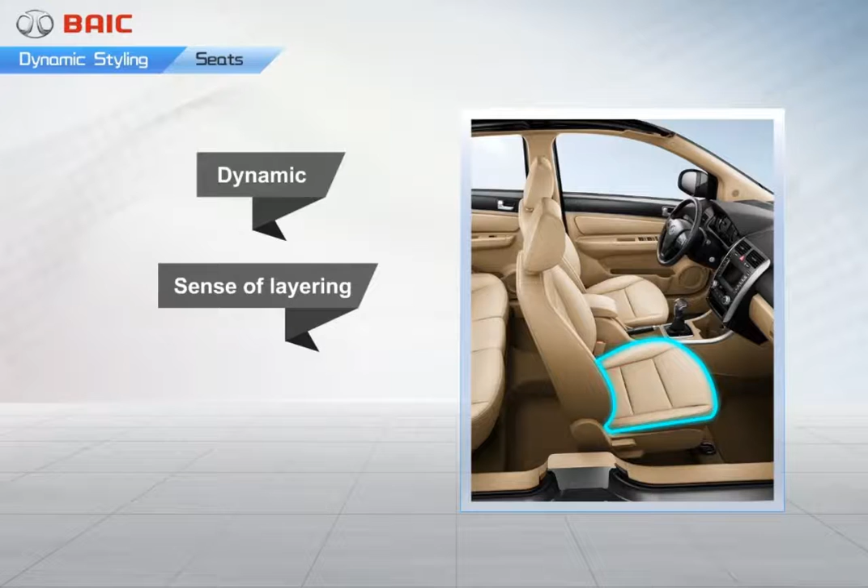The main seat fabric adopts a more dynamic and layered pattern to enhance the dynamic atmosphere of the interior.

The three-spoke sporty steering wheel design of the Senova adds a thumb groove in line with human hand ergonomic principles, enabling the driver to hold the steering wheel more firmly. The steering wheel has a large diameter and an almost vertical angle to generate a great sense of sports driving.

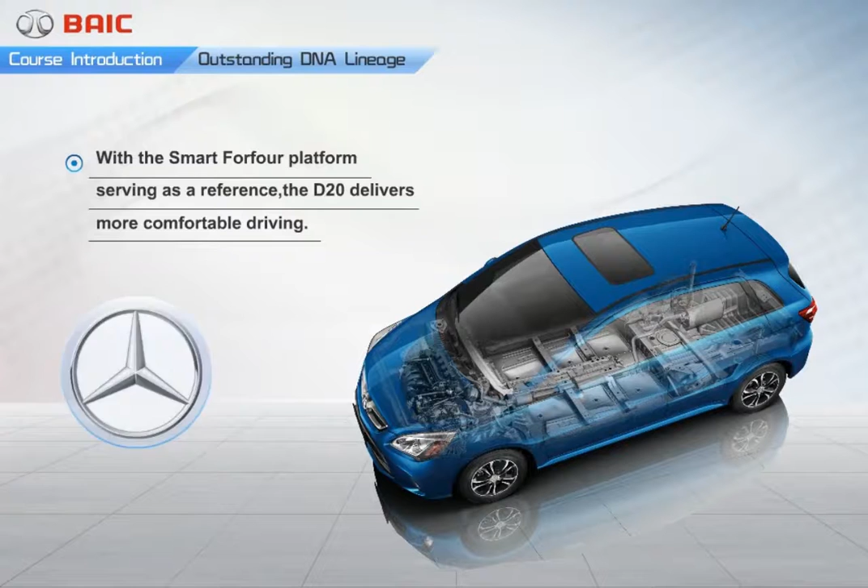With the Smart Forfour platform serving as a reference, the D20 incorporates MacPherson suspension at the front and rear torsional beam suspension to achieve more comfortable and stable steering control. Its steering system features variable speed ratios and a high rigidity steering column to ensure more responsive control.

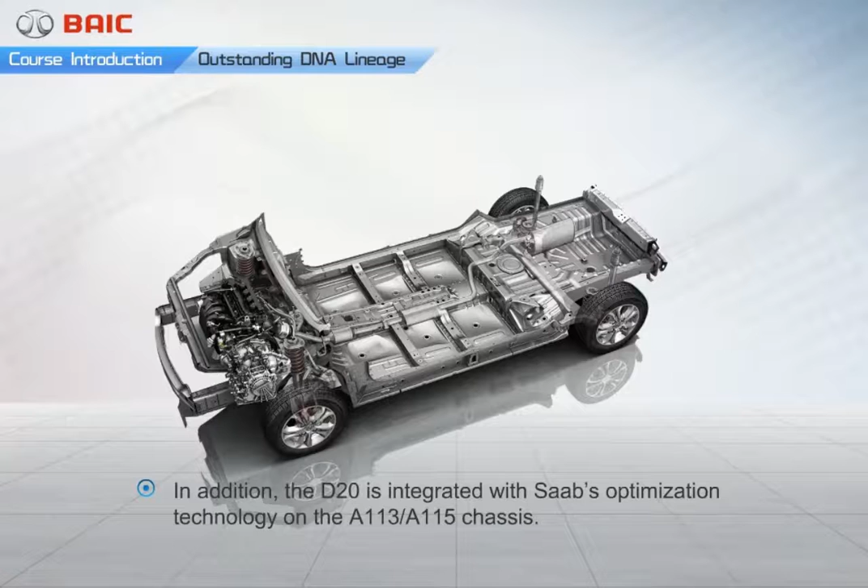Based on the A113-A115 chassis, the D20 is integrated with Saab's Nordic optimization technology to achieve outstanding chassis weight reduction. Saab standards are also implemented for the parts quality management of the D20 to ensure perfect quality from individual parts to the entire vehicle.

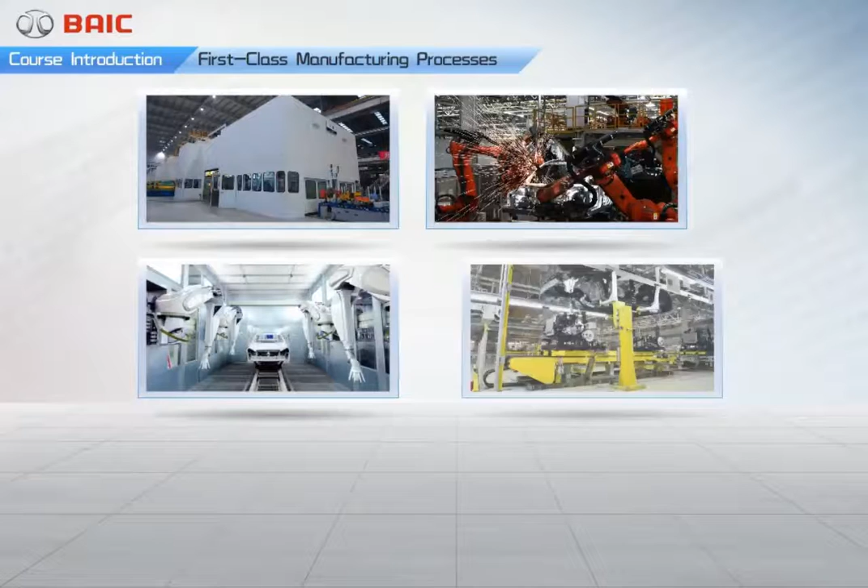The D20 plant features 4 major processes, i.e., stamping, welding, painting, and assembly, all of which are designed in accordance with Hyundai's model. Saab's established production line suppliers are also a crucial link in the world-class manufacturing technologies integrated into the D20.

100% automation is used to install all the key components of the D20 to ensure extremely high product quality stability, and that every D20 is an exquisite product.

Outstanding chassis and manufacturing processes alone are not enough. For the tuning of the D20, BAIC has brought in Mira, a world-class auto tech company which has also served Jaguar and Volvo. Using advanced simulation software and thorough rounds of meticulous tuning, Mira brings outstanding chassis controllability to the D20, integrating Saab's DNA and perfectly combining comfort and controllability for great driving fun.

To ensure that every D20 is an exquisite product, which of the following processes is a world-class manufacturing technology integrated into the D20? Please select.

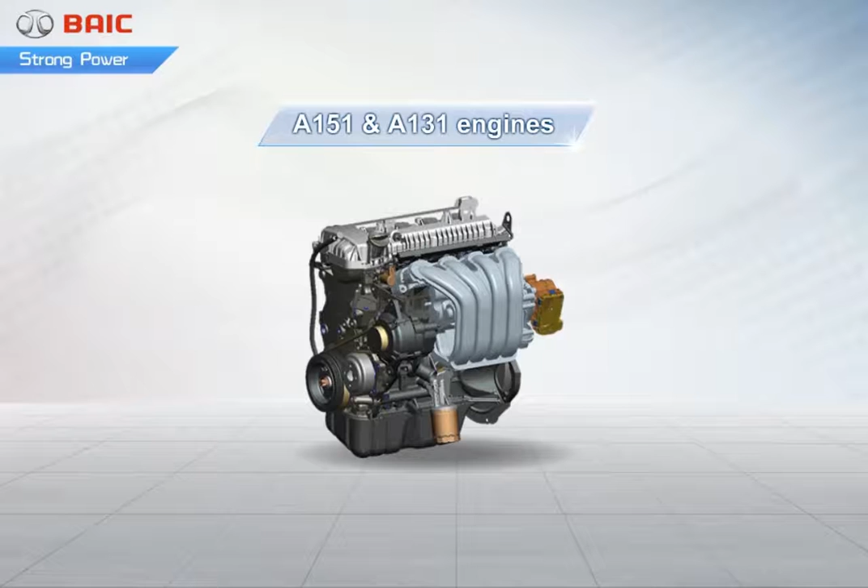Now let's look at the power aspect of the D20. In this part, we will begin with the engine and transmission. The D20 is equipped with a completely new A151 or A131 engine, meticulously developed by BAIC Powertrain Company Limited. These engines are characterized by powerful output and ample torque.

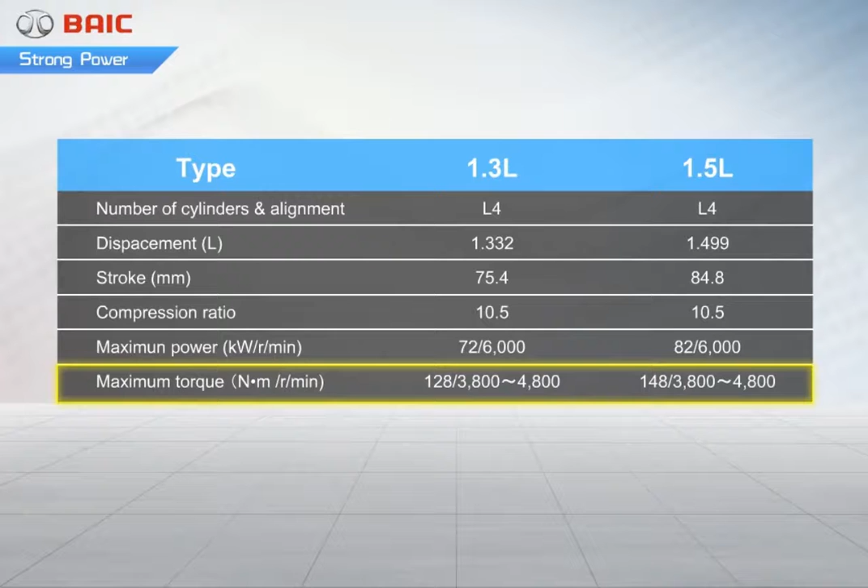Among cars of the same class, the engines installed in the D20 have greater power and torque per liter, allowing easier vehicle starting and acceleration. The engine generates its peak torque at 3,800 RPM to drive the vehicle forward at full speed.

As for the main technical features, the following items are included with the engines used in the D20: variable length intake manifold, low friction design, lightweight, and intake VVT control technology. Now we will look at these features one by one.

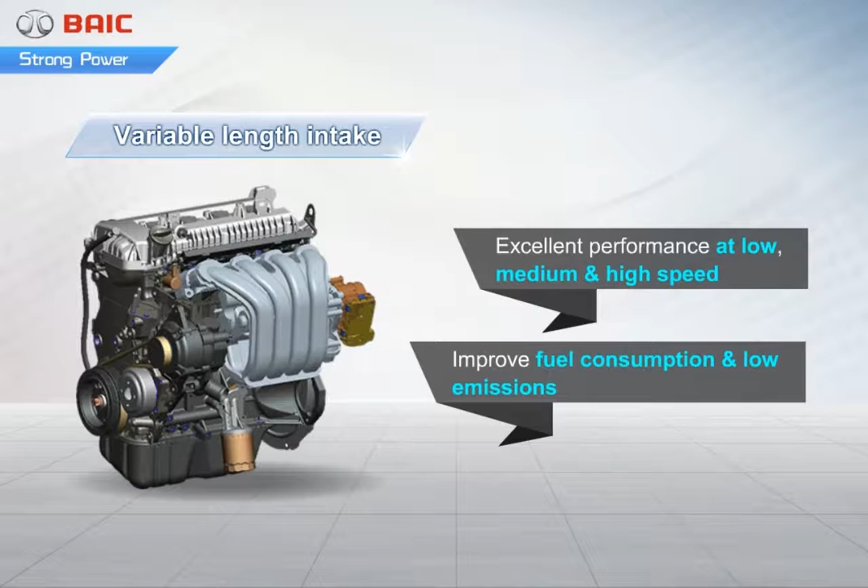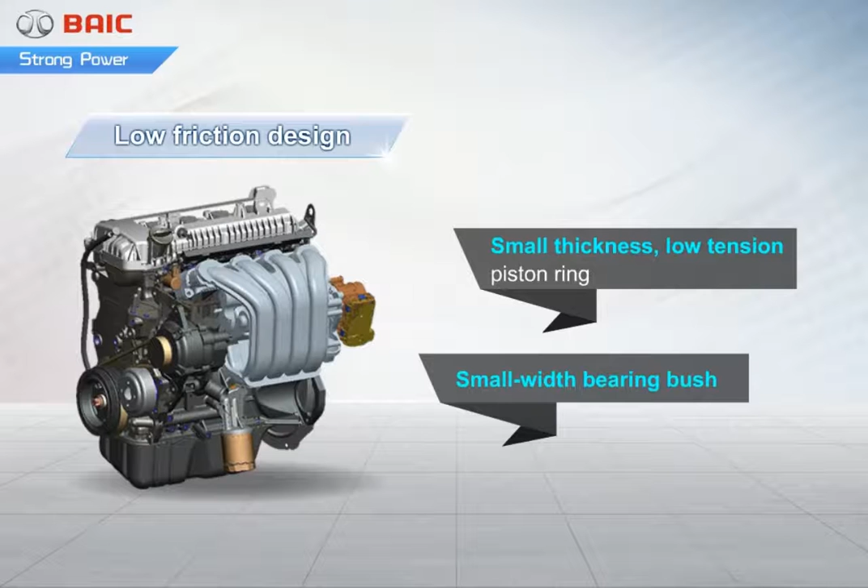The variable length intake manifold ensures excellent performance at low, medium, and high speeds, and can markedly reduce fuel consumption and exhaust emissions. In addition, the low friction design adopts a coating layer on the piston surface. Friction is reduced through a small thickness, low tension piston ring and a small width bearing bush.

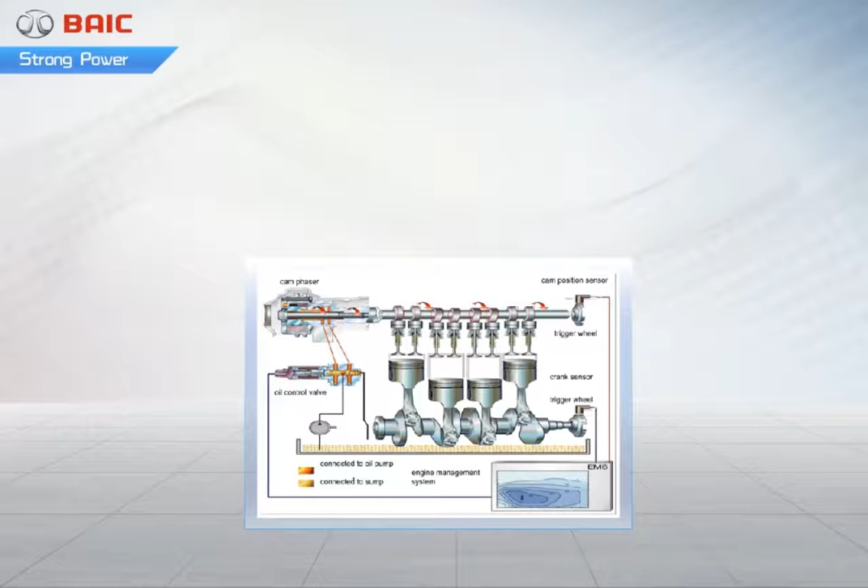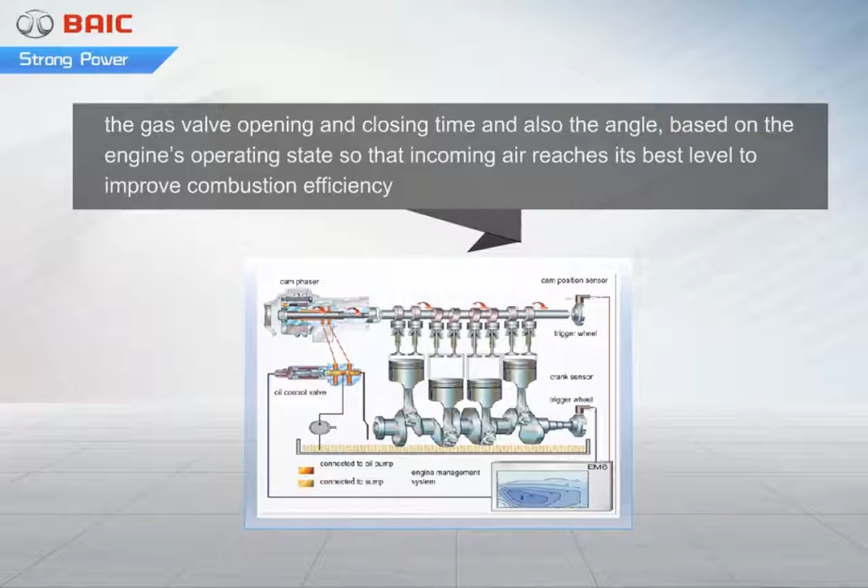VVT is a technology that can adjust the air intake exhaust volume, the gas valve opening and closing time, and also the angle based on the engine's operating state, so that incoming air reaches its best level to improve combustion efficiency, while ensuring high torque at low speed and high power at high speed. It helps the vehicle achieve higher fuel economy. This engine technology makes the D20 the best economy family car for urban users.

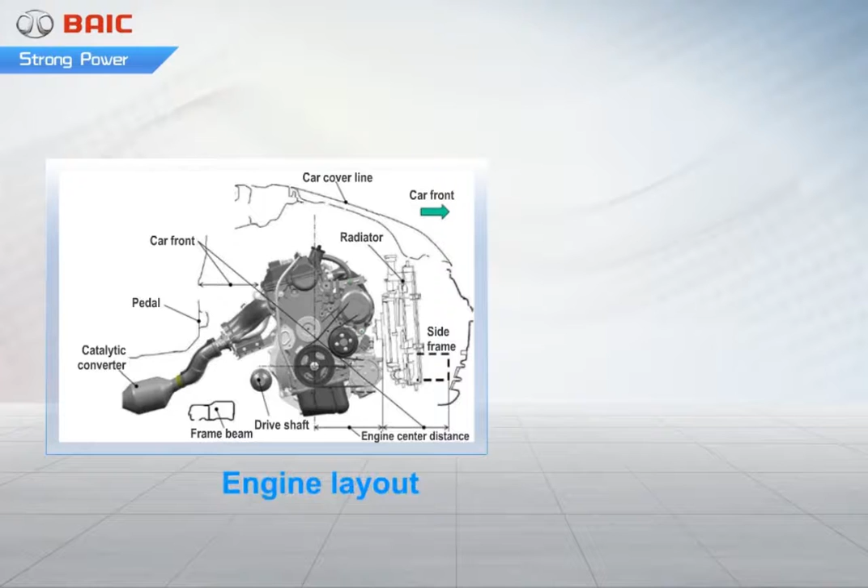In addition to their technological advances, the engines used to power the D20 have even greater layout advantages. The D20 makes use of a rear exhaust engine layout. This not only reduces the number and weight of components of the exhaust mechanism, but also allows for a shorter exhaust and higher exhaust efficiency, all of which leads to better engine power performance. Meanwhile, the rear exhaust layout can also expand the buffering space of the engine compartment and enhance safety.

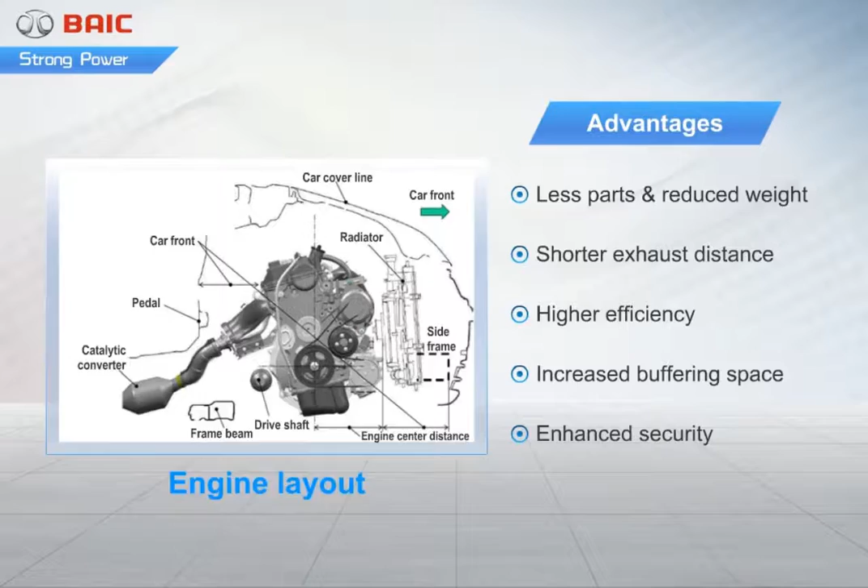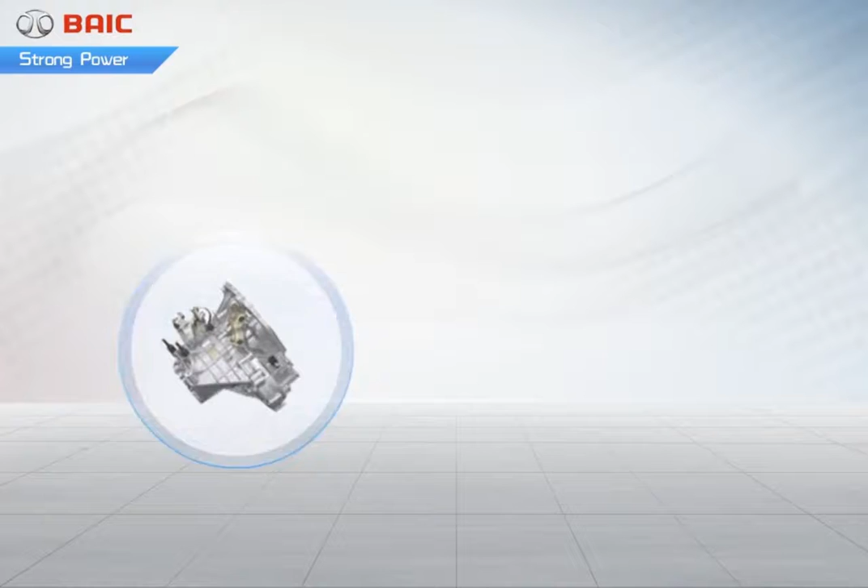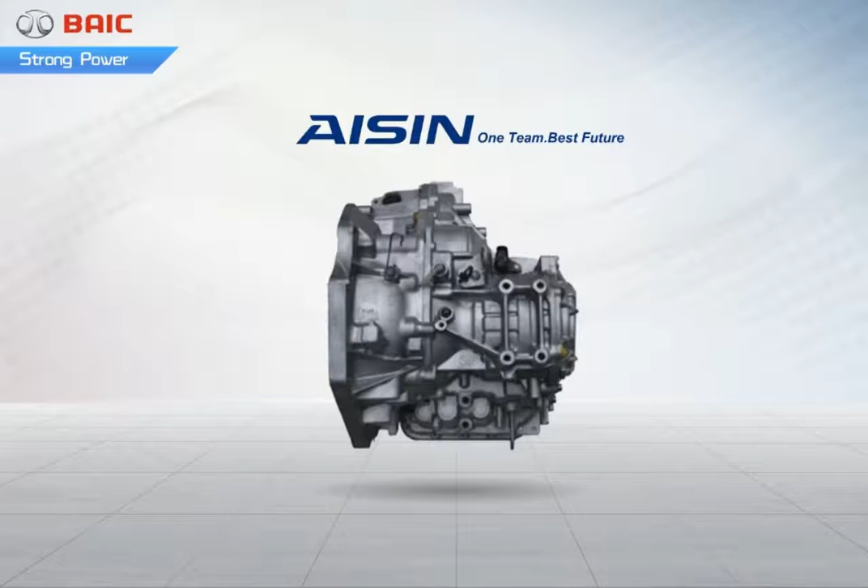Next, we will focus on the transmission of the D20. To meet different customer needs, the D20 has two kinds of transmissions: manual and automatic. The manual transmission is produced by a domestic Chinese company and features mature technology, and is very popular in the market. The D20's automatic transmission adopts Aisin 4-speed transmission technology.

Aisin is a famous transmission brand around the world. Its transmissions are extremely popular with all leading car makers for their smooth gear shift, lightweight, low noise, and ability to promote low fuel consumption. Almost all models of the famous car brand Toyota are equipped with Aisin transmission technology.

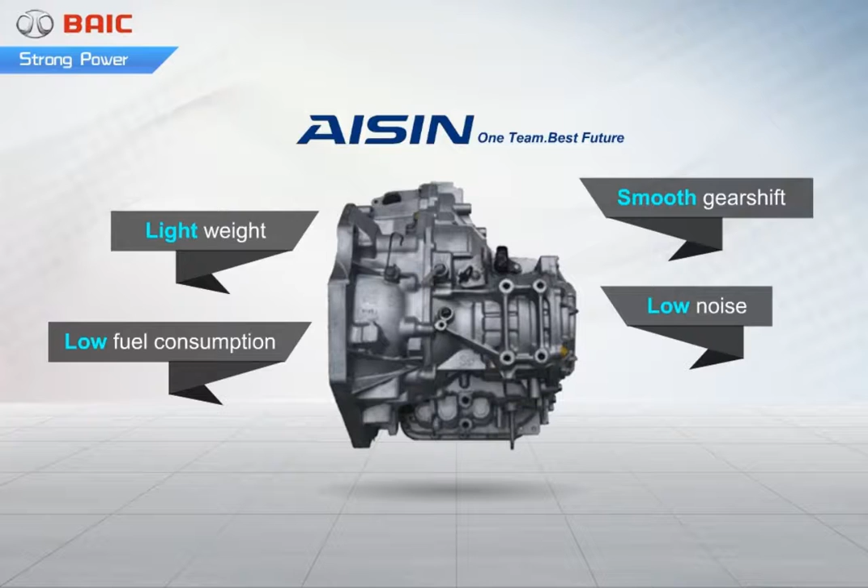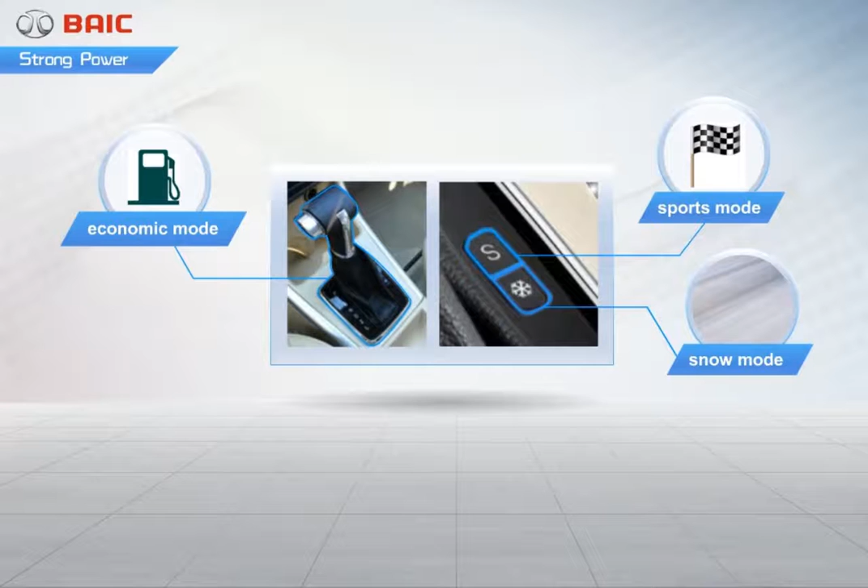The D20's automatic transmission has 3 modes: Eco, Snow, and Sport. You can switch over between these 3 modes by pressing the button beside the shift lever. Different transmission modes mean that the D20 can adapt to various road conditions and driving habits and achieve greatly enhanced overall controllability.

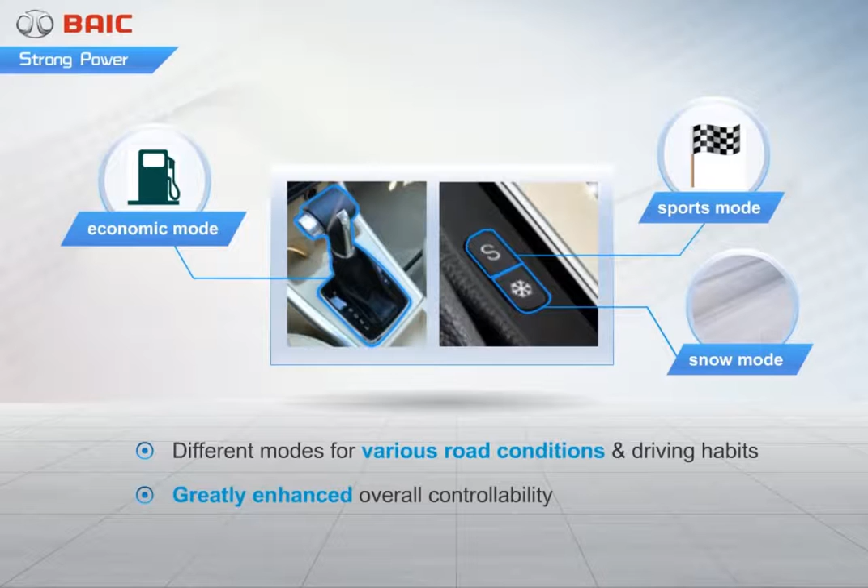After completing the above contents, we will have a small test to see how much you have learned about the engine features of the D20. Please select the answer you think is correct.

Now we will go through the high-strength body, braking security configuration, passive security configuration, reverse safety system, headlight security configuration, and external security configuration to understand another knowledge point of the D20: excellent safety.

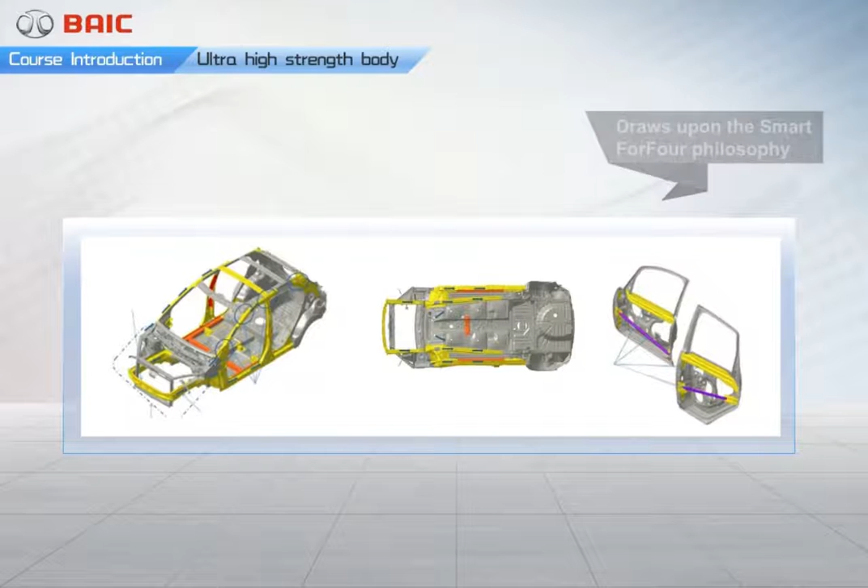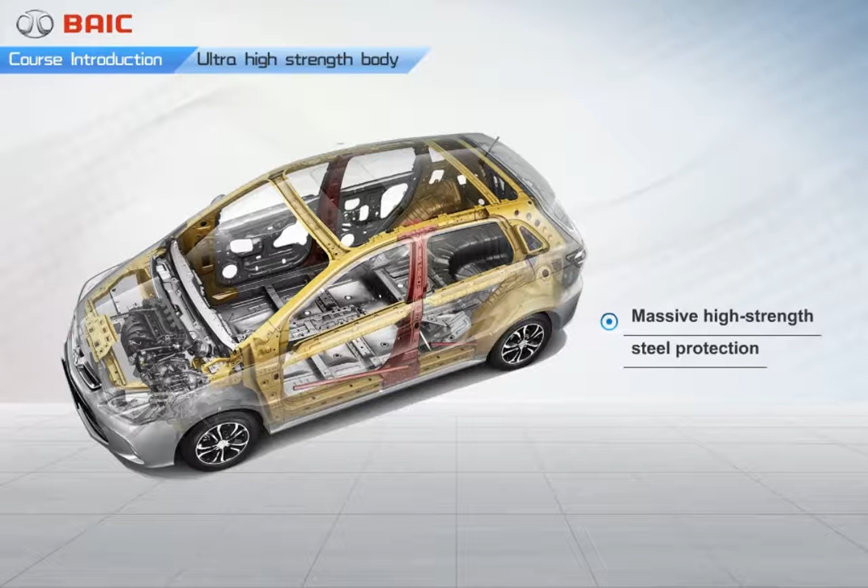The D20 draws widely upon Smart ForFour's safety vehicle body design philosophy. The entire cabin of the car is protected by high-strength steel. All 4 doors have built-in bumper bars, resulting in a marked improvement in the crash rigidity of the D20's cage-type body.

As for welding, the D20 utilizes a laser welding process, which can effectively enhance overall body strength and corrosion resistance, while reducing body weight.

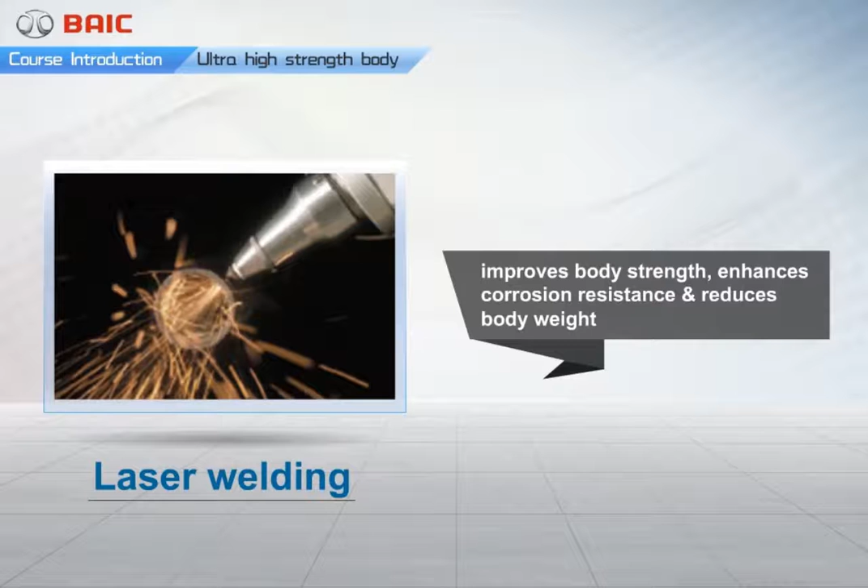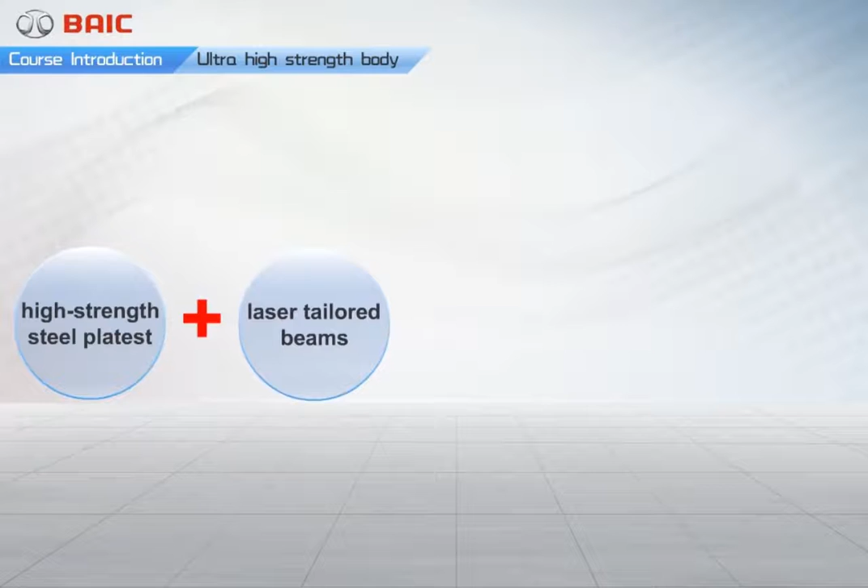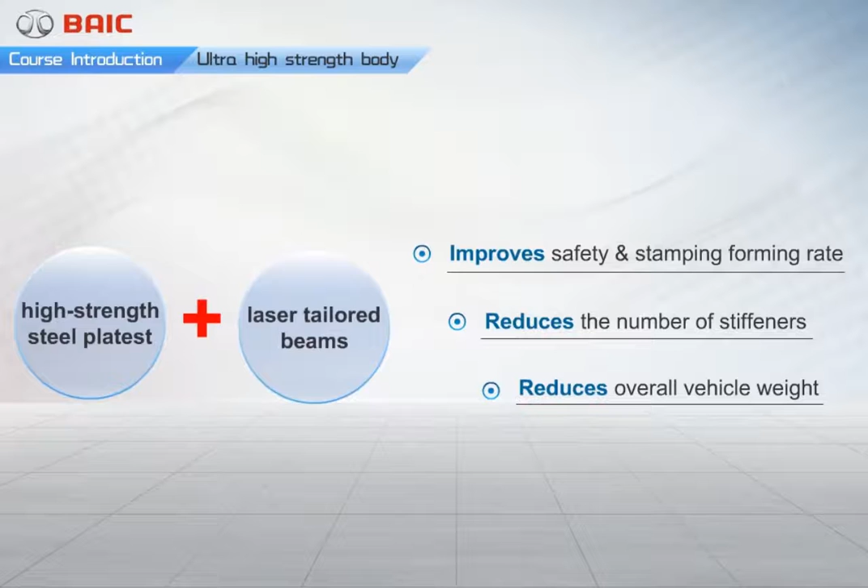In addition, the D20 also incorporates a large number of high-strength steel plates and laser-tailored beams. This can improve crash safety, reduce deformation, and improve corrosion resistance, as well as reduce vehicle weight and the number of stiffeners required. As for vehicle door manufacturing processes, a highly advanced technological process is used.

This is the one-piece stamping process used to form the doors. Compared with traditional welded doors, those formed by one-piece stamping have greater dimensional precision and higher process specifications, comprehensively outperforming traditional welded doors. The D20 features impressive and highly effective brake safety configurations and passive safety configurations.

We will now look at them one by one. When people drive regularly, it is inevitable that they sometimes encounter emergency situations.

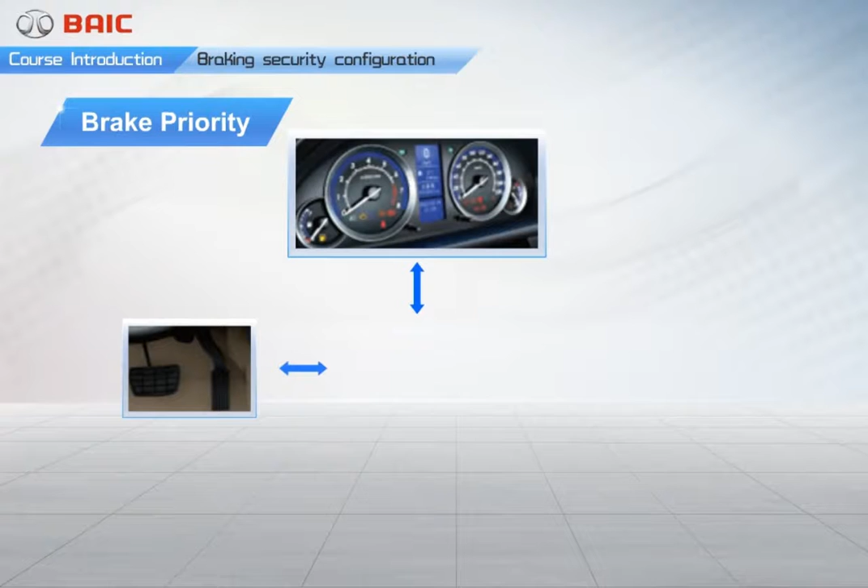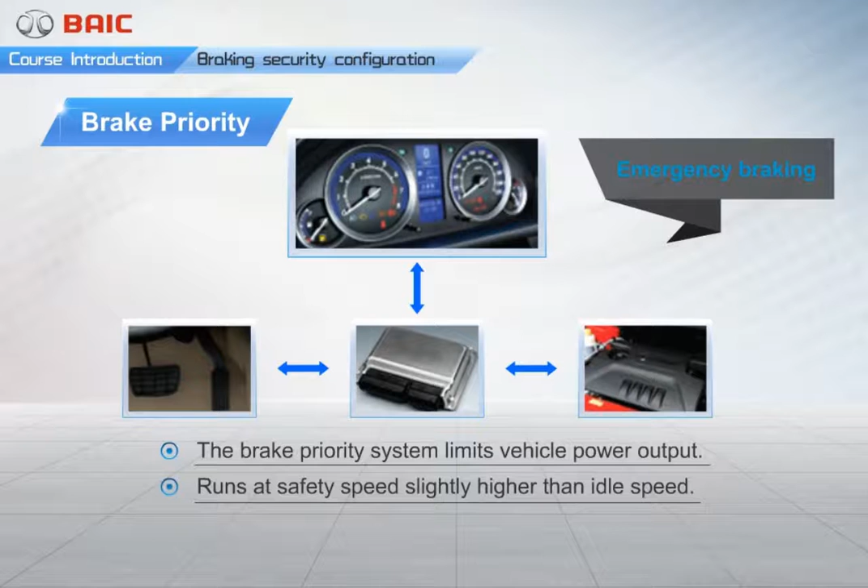If by accident you step on both the accelerator pedal and the brake pedal simultaneously, your vehicle will lurch forward, posing a great danger. But the brake priority system can prevent such situations. If the accelerator pedal suddenly becomes stuck while driving and the driver attempts emergency braking, the brake priority system can limit the power output of the vehicle, so that the engine will run at a safe speed slightly higher than idle speed, no matter how hard the accelerator pedal is pushed. This means the brake priority system plays a role in ensuring a double safety effect.

I believe you are all familiar with the terms ABS and EBD. All models of the D20 are equipped with Bosch ABS and EBD 9.0 systems.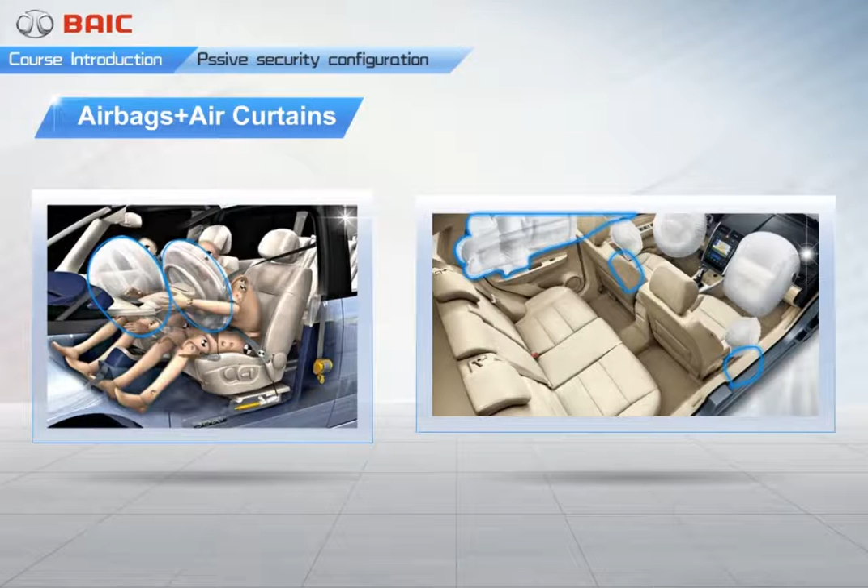Next, let's look at the passive safety equipment of the D20. The D20 features comprehensive safety equipment, including dual front airbags that protect the head and chest of the front passenger, and side airbags and side air curtains that protect the side of the head and shoulders of the front passenger. Even in the event of an unexpected collision, this type of safety equipment can comprehensively improve safety and provide a better guarantee for the personal safety of the driver and passengers.

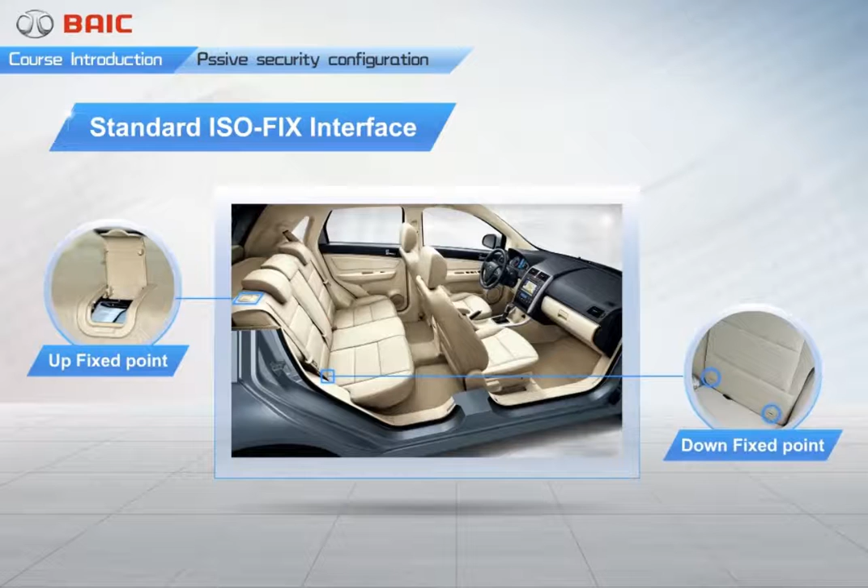If you wish to carry a child in the car, the D20 is also equipped with an ISOFIX interface, which complies with the European standard. It is characterized by a rigid connection, high strength, resistance to loosening, ease of installation, and excellent application characteristics. It can firmly fasten a child's safety seat to the rear seat of the car.

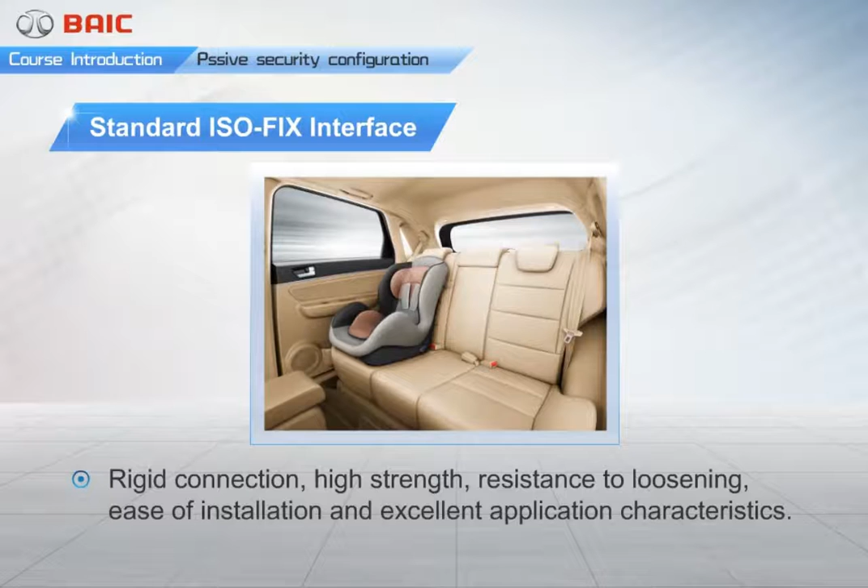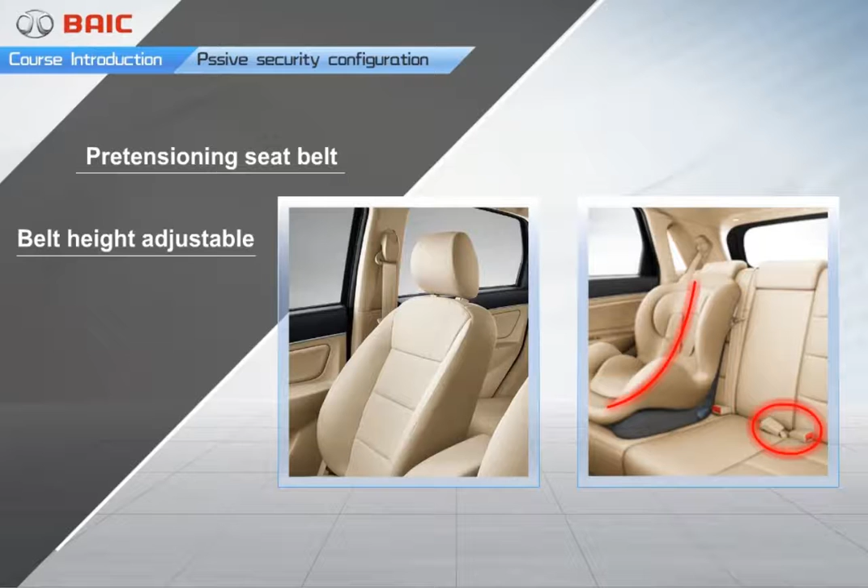The D20 is equipped with pre-tensioning seat belts whose height is adjustable. The front seat belts trigger an alert when unfastened, while the rear seat belts of the D20 are of the 3-point fixing type.

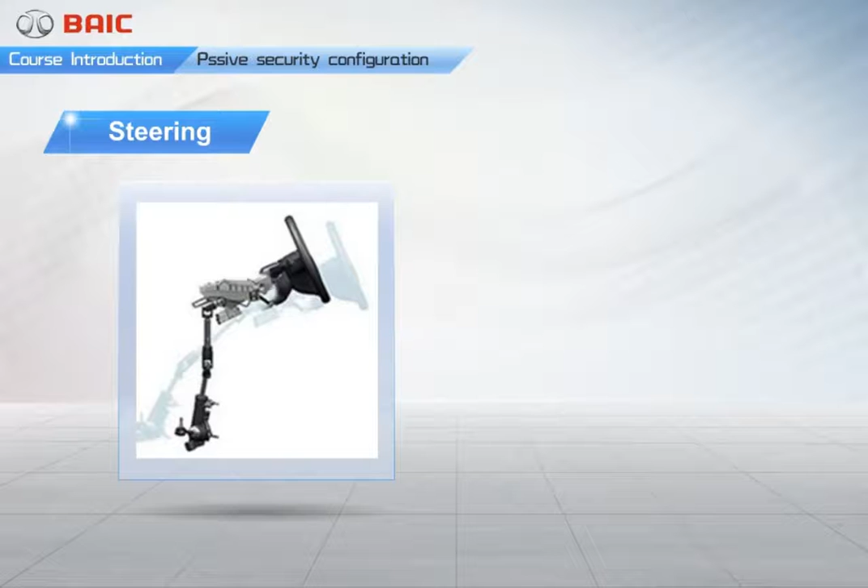In case of crashes or other emergencies, the door locks of the D20 will automatically unlock. At the same time, the system will automatically cut off the fuel supply and ensure safety in an emergency. In addition, the adjustable multi-level crumple steering column below the steering wheel can effectively reduce secondary injuries during vehicle collisions.

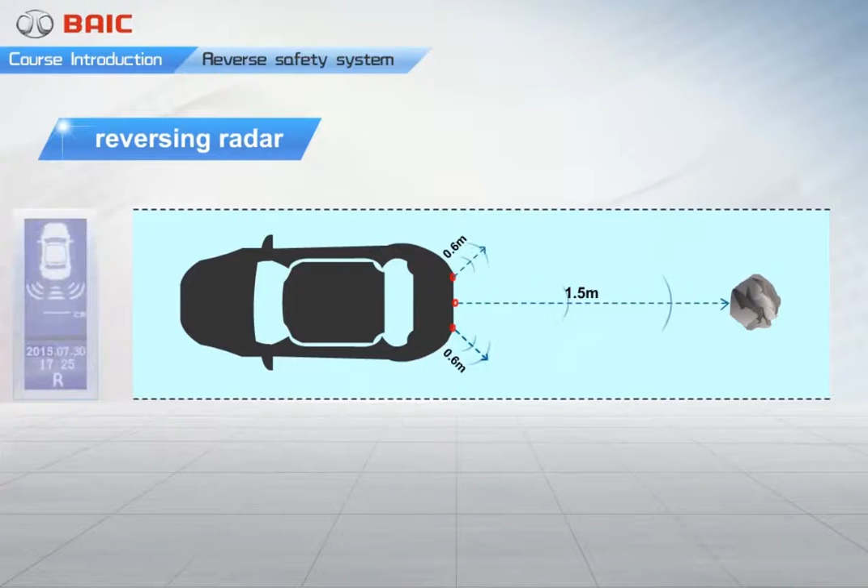Now we will look at the reversing assist system. This system is divided into two parts: reversing radar and reversing image. Let's first look at the reversing radar safety system. The reversing radar of the D20 has a maximum detection distance of 150 centimeters.

In the top configuration model, the 6.5-inch LED screen on the center console of the D20 can display an image from the rear while reversing. This enables the driver to easily and safely reverse the car into a parking space, even on congested roads. It provides great assistance to the driver.

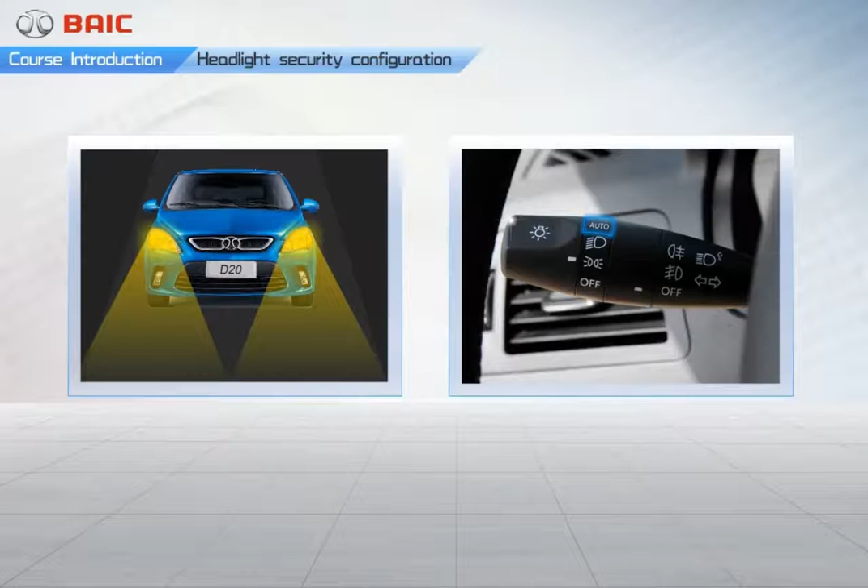Headlights are important for all cars and have a direct impact on driving safety. The headlights of the D20 are integrated with several functions. Firstly, the D20 is equipped with light-sensitive automatic on-off headlights. Sensors on the front windshield sense the level of light outside the vehicle and automatically control the on-off function of the headlights. When the ambient light dims while driving, the headlights will automatically come on. When the ambient light improves, the headlights will automatically go off. This is a configuration rarely seen on other cars of the same class.

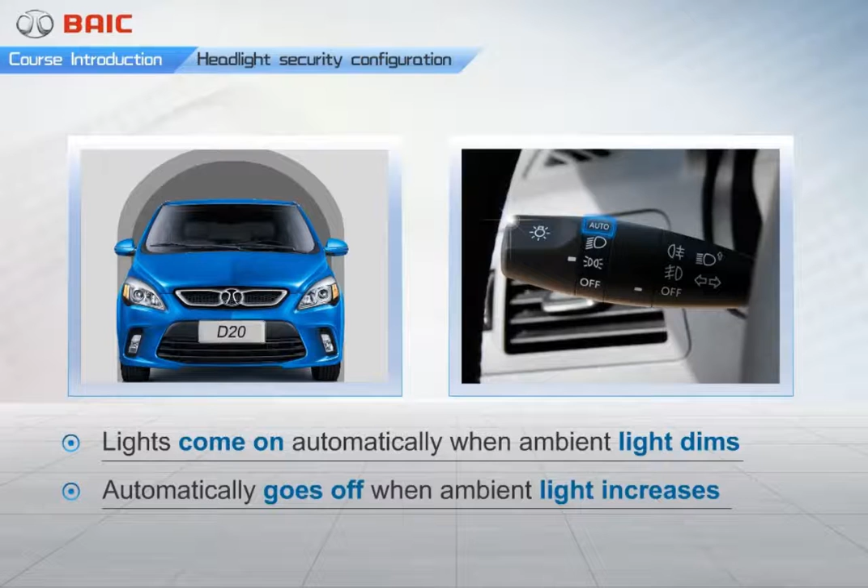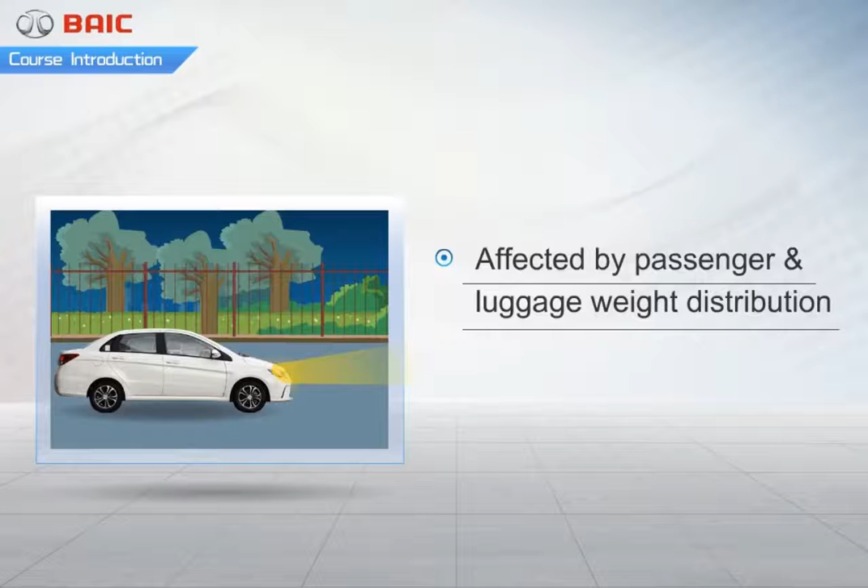Secondly, the headlights of the D20 also have a Follow Me Home function. After this function is set up, the system will allow the headlights to remain on for a while and provide external lighting to the driver for a certain period to aid the driver and ensure safety. Finally, to prevent the angle of the low beam lights from being affected by the distribution of passenger and luggage weight inside the vehicle, the D20 has a headlight height adjustment function to ensure a suitable light beam angle is retained in front of the vehicle and no dazzling effect is produced on other road users.

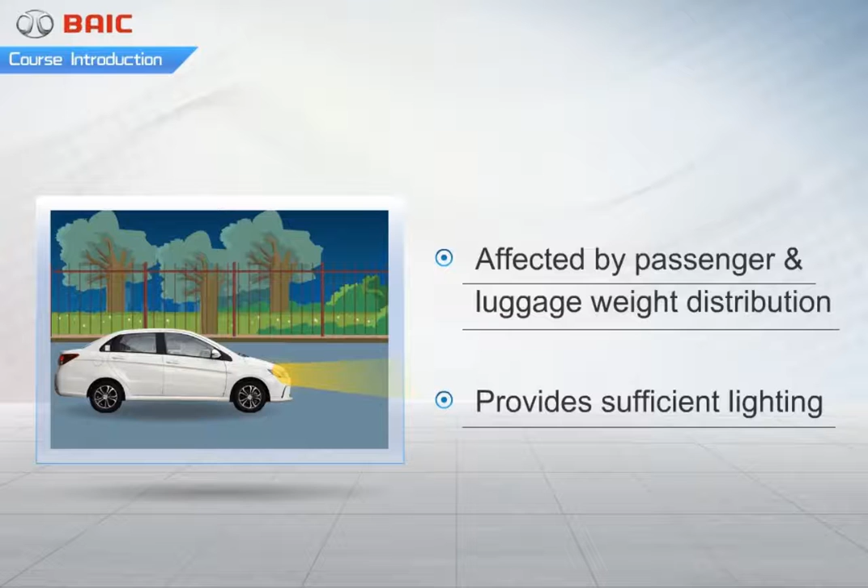As is the case with many luxury car brands, there are many novel functions hidden in the exterior rearview mirror of the D20. It possesses not only an electric adjustment function, but also electric folding and electric heating functions, which are rarely seen on other cars of the same class. While greatly enhancing the sense of luxury of the D20, it also effectively improves driving safety and convenience when using the vehicle.

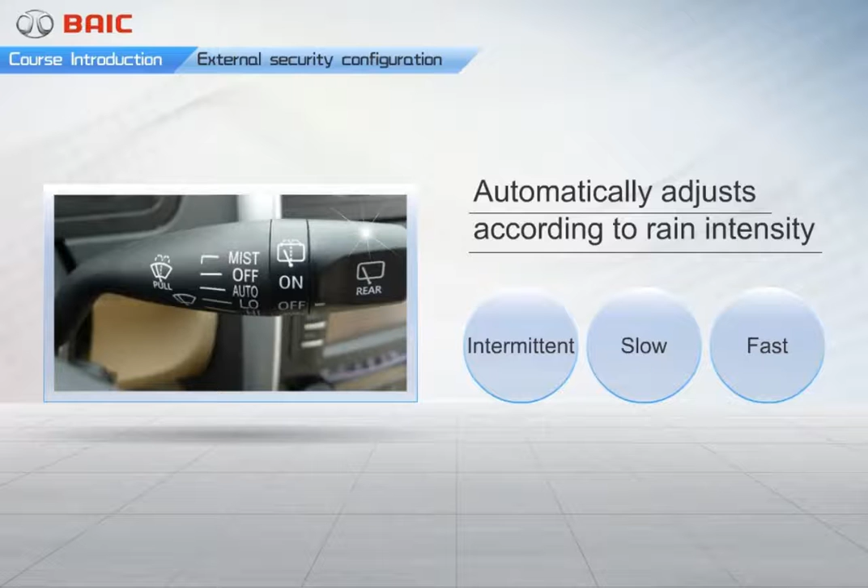The D20's smart rain-sensing wipers are a configuration rarely seen on other cars of the same class. On rainy days, switching the front wipers on and off can be controlled automatically according to the intensity of the rain, with convenient switching between the three modes of intermittent wiping, slow wiping, and fast wiping. To a great extent, this frees the hands of the driver, who no longer needs to frequently push the combination switch to adjust the wipers to suit changes in rain intensity.

After learning the content of this chapter, I believe we have a great understanding of the D20's excellence. Select the one you think is right.

Finally, let's learn about the premium configurations of the D20. Let's first look at the steering wheel of the D20. The steering wheel of the D20 features leather wrapping, which gives a soft and comfortable feel. It also houses cruise control, volume control, and other multifunctional buttons to ensure convenient and safe operations.

Everything is at your fingertips.

When the cruise control is active, the driver no longer needs to press the accelerator pedal. The onboard computer will automatically control the fuel supply and keep the vehicle at a fixed driving speed. This can both greatly ease leg fatigue and effectively avoid excessive fuel consumption resulting from frequent gear changes.

The cruise control can help the driver avoid foot fatigue, while the MP4 interface and reserved GPS hardware slots provide a relaxed and comfortable driving and sitting environment for the driver and passengers.

As for entertainment equipment, we must mention the sound system of the D20. The system is equipped with a CD player, 6 loudspeakers, an AUX plus USB interface, and so on. It also features a speed-dependent volume adjustment function, which can automatically increase the loudspeaker volume when the vehicle speed increases and the ambient noise level rises, thus ensuring an excellent listening experience.

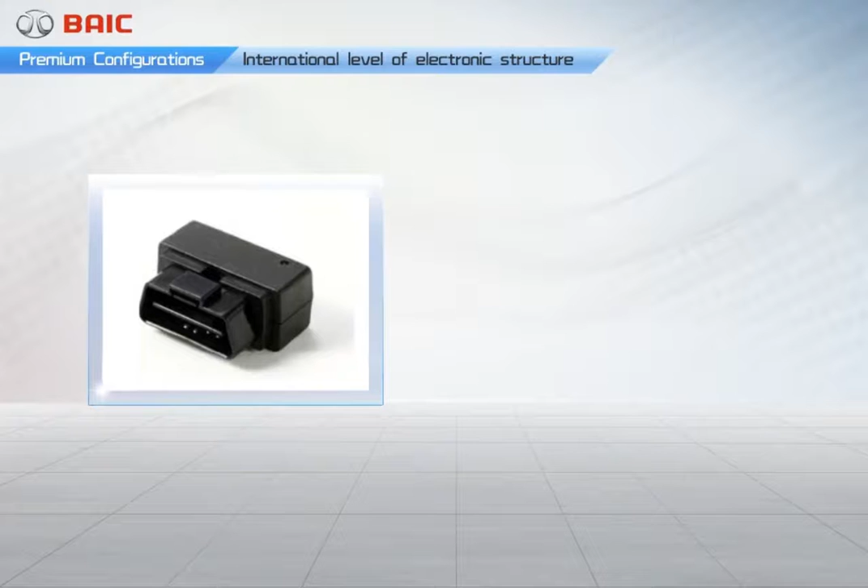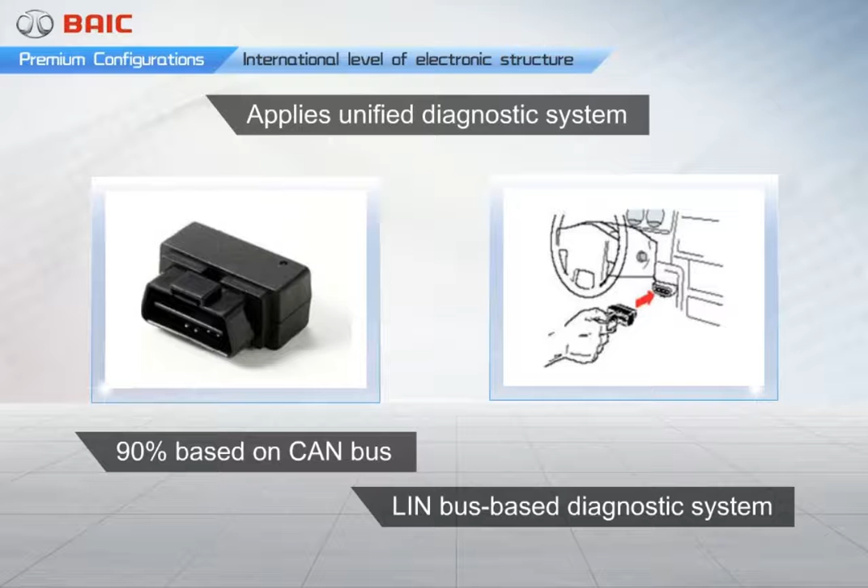The D20 also has internationally advanced electronic architecture. The D20 adopts an electronic diagnosis platform for A0 class sedans. A unified diagnostic system is adopted, with 90% of diagnoses achieved based on the CAN. The D20 is also the first model to be equipped with a LIN bus-based diagnostic system and supporting diagnostic gateway functions.

In addition, the D20 also adopts advanced 64-bit engine anti-theft technology and integrates the key ID, PIN, VIN, SK, and other data into the key chip. When the vehicle starts, it uses a rolling code to read the key and quickly transmits the information to the engine control module. This technology is efficient and safe and guarantees full vehicle safety.

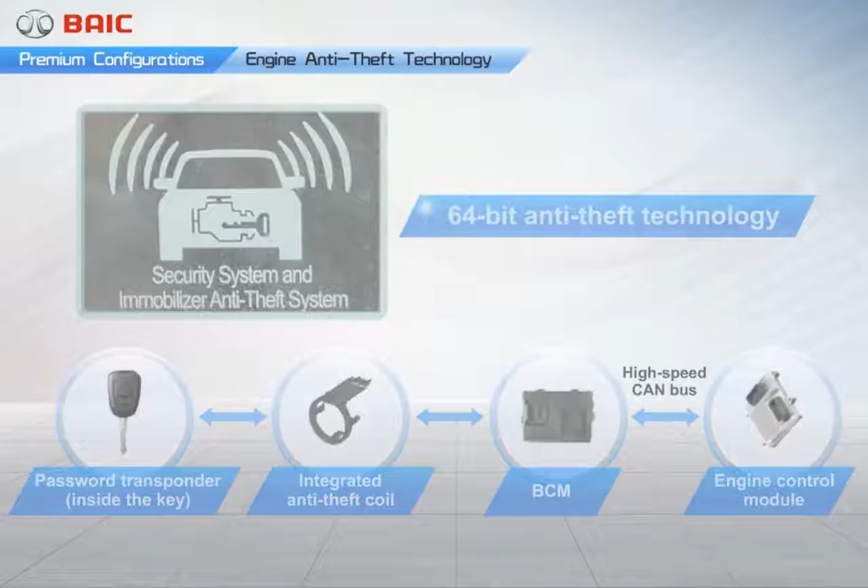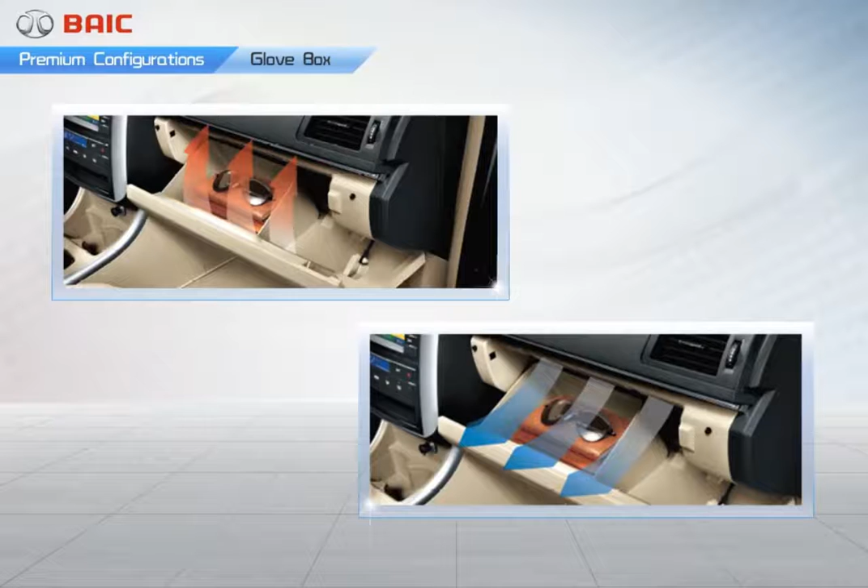The cold and warm glove box of the D20 is connected with the air outlet of its air conditioner and can leverage the refrigeration heating function. It offers great convenience in both winter and summer. In summer, you can put your drink bottle or can in the glove box for cooling by the air conditioning system.

Rich storage spaces also help to bring about a convenient vehicle use experience. There are 22 storage spaces in the D20. Compared with other cars of the same class, the D20 offers the greatest convenience for storing small items.